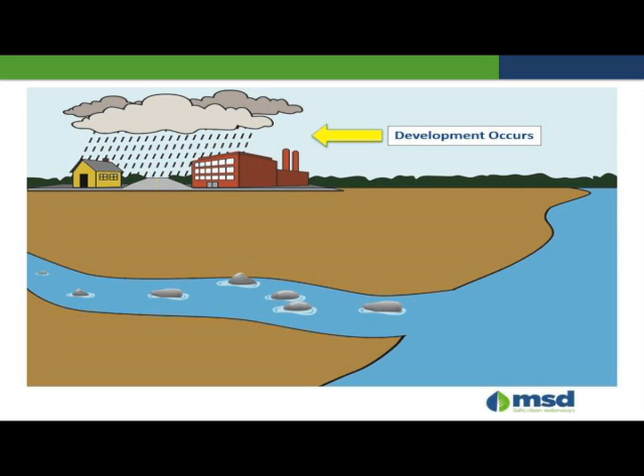Prior to sanitary sewers, what happened to the waste that left a facility, whether it's a house or a building? It ended up in the street. They just tossed it out the window. It was out of the house, out of their way, no big deal.

Well, as you know, this leads to health problems. And in order to combat the health issues associated with the disposal of waste in this manner, they started piping everything directly to the nearest creek or stream and turned those basically into sewers, the early sewers. They'd put a cover over the top of them, and then everything would make its way to the creek and the river.

Kind of a schematic of what it is. As you can see, the one on your left is how the combined sewer system worked. A sewer left a house or a building to a sewer in the middle of the street, tied in directly to the nearest creek, river, or stream. So anytime anything went through those pipes, it went to the water body.

As civilization progressed and water treatment technologies became available, water treatment plants were built. Louisville did not put Morris Forman into operation until 1958. So think about that: within the last 60 years is all we've had water treatment in the city of Louisville. And the city's been around a long time.

So in order to get the flow from the sewer to the treatment plant, what they did to the sewers is they went in upstream of the water body. They put in what we call a dam or a weir, which is like a concrete structure up to a certain height in the pipe. And what that did is it helped divert water from the river to the pipe to the treatment plant, as you can see by the low flow line that's shown there.

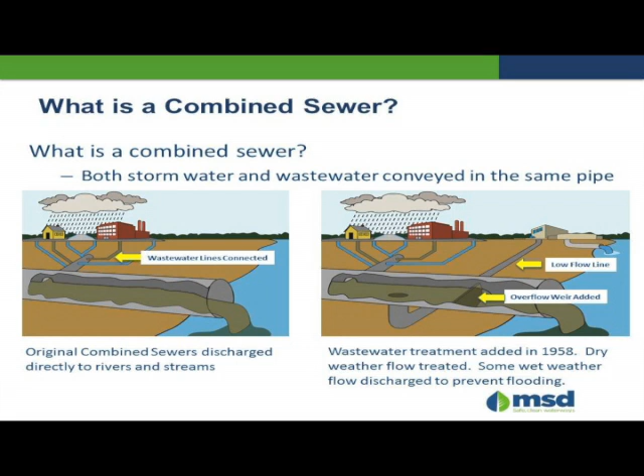However, that was only sized for average daily flow, which you would see during a typical day. It didn't account for rain events. So anytime it rains and the sewers become overwhelmed, the flow goes over the weir and straight to the water body, which in our case for this project is either Beargrass Creek or the Ohio River.

With rain events, it only takes about 1/10 of an inch of rain to create an overflow in the combined sewer system area. The combined sewer system area is roughly the boundary of the Ohio River and the Watterson Expressway, so anything within that is considered the combined sewer area, where storm lines tie into the sanitary sewer lines.

Some of the sewers that were built, the early sewers, such as the Southwestern Outfall, built in 1932, are still in service today. So a lot of the older sewers we have are still in service, and these are the ones that carry flow to the treatment plant or to the river during an overflow event.

Overflows, what do they look like? There's several different scenarios. This one is the sewer itself adjacent to a water body. And when the sewer becomes overwhelmed, the water comes out straight through the manhole. So it blows the manhole off the top, water goes to the creek.

Here's another one in a neighborhood. The sewer system is overwhelmed here, and the flow's coming out of the manhole in the street right in front of the residential properties. Where are sewer overflows?

It's basically throughout the service area of MSD. The combined sewer system, as I said, is within the Watterson Expressway. And that's what we're here to focus on today as we talk about it.

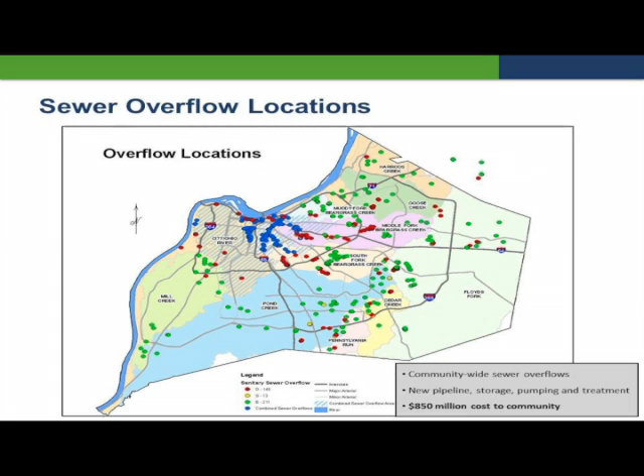How do you control sewer overflows? Well, there's several different ways. You can control it at the source with green infrastructure, such as rain gardens, bioswales, planting of trees, removing of impervious pavement. You can disconnect the downspouts from the sewer system. Previously, they went into pipes and tied into the drains, which tie into the sewer. So we have a program that allows you to disconnect your downspouts and put them on the surface.

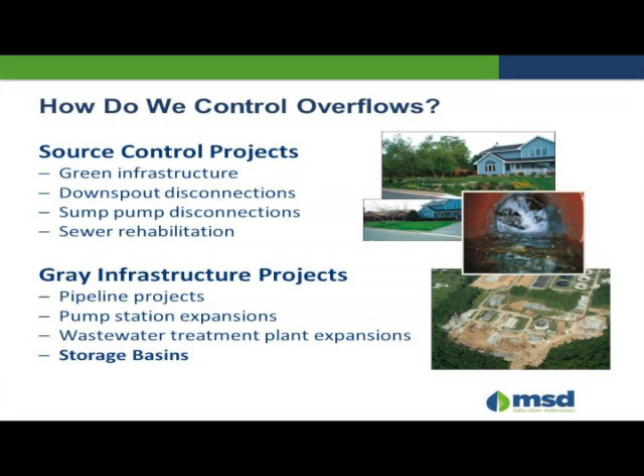You also have the option of disconnecting sump pumps, because sump pumps typically in the past have been connected to the sanitary sewer line of the house, which goes to the sewer and eventually the creek as well. So if you discharge those above ground, that helps remove that flow from the sewer system.

Or you can do sewer rehab, which you go in, you cut out the roots, you repair any cracks or deficiencies, and line the pipe if necessary to keep any groundwater from getting into the sewer itself. So you reserve capacity for the sewer flow from the facilities instead of groundwater.

Other options are gray infrastructure, which are pipe projects, where you put in new sewer systems, you abandon old ones, pump station expansions, wastewater treatment plant expansions, or storage basins. Storage basins is what you've probably heard a lot about, and there's been a lot of them built within the community. It's part of our consent decree program.

As you can see on the timeline, there's 4 separate stages. One was the sewer separation, or separate sewer system projects in the early stages. Got us the most bang for our buck on the volume of overflow to the river. Next was treatment center eliminations.

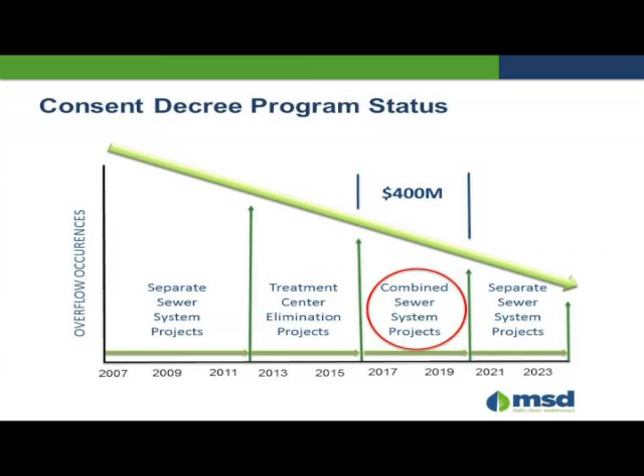At one point in time, MSD had over 300 small package treatment plants. Today, we are down to 5 regional treatment plants. So we have better technology treating the water instead of the old, outdated package treatment plants that were installed.

The phase of the project that we're in now is the combined sewer system projects, which are the storage basins or the Ohio River Tunnel project. That is slated to go until about 2020.

At the end of that phase, we will move over into the separate sewer system projects once again to clean up what is left in the IOAP. As you can tell, the projects that we're in now is about a $400 million undertaking. So from 2017 to 2020, about $400 million.

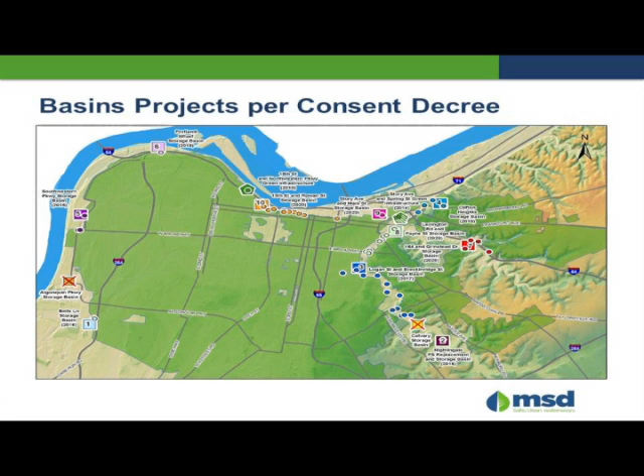The map you see here is the location of the basins. As you can see, it's not concentrated necessarily in one area. It's kind of spread out within the combined sewer system area. And those locations are identified based on where the actual overflows occur. So anywhere there's a pipe that may tie into the water body, the facility is generally built within that area. That way we can capture it before it goes out.

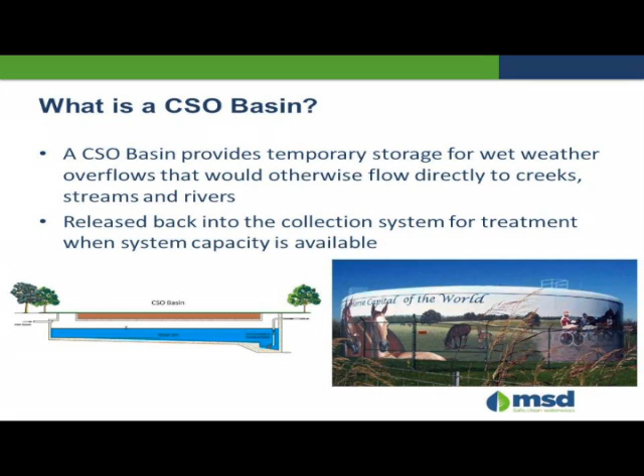So what is the CSO basin? It's basically a temporary storage facility where you catch the overflows before they go to the creek during a rain event. Once the rain event is over, those flows will be pumped out of the storage tank and back into the sewer system for conveyance to the treatment plant for treatment and release back into the Ohio River.

So a lot of questions we ask about the storage basins. Will they create backups? No. The way we have it designed is that the high water elevations of these facilities are below basement elevations and generally the existing sewers that they're taking flow from.

What happens when the system is full? When a basin is full, the overflow occurs then as it does now. It goes out of the same existing pipe we have right to the creek or the river.

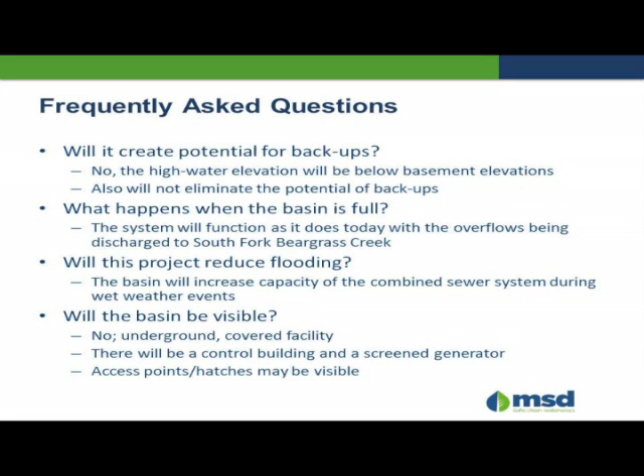Will this reduce flooding? While the basin takes wet weather flow out of the pipe, it does not reduce flooding in areas. It's not a flood control project.

Will the basins be visible? The general answer is no. A lot of these are being built in such a way that they are covered when they're done. You may see a control building or some other feature that is above grade, but overall the facilities are buried when finished. Odor, everybody always asks about odors.

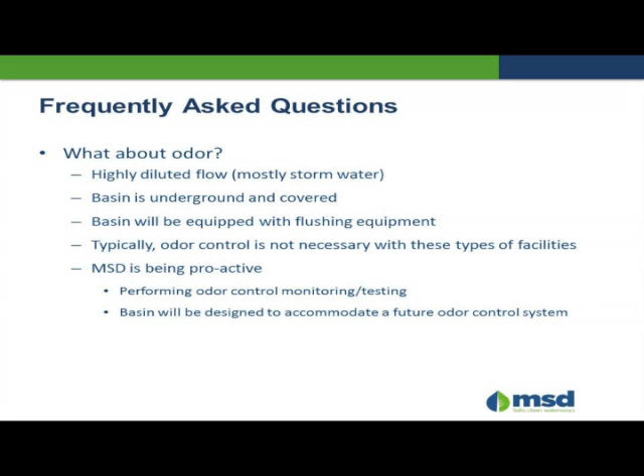Generally, there are no odors associated with these facilities. Most of the time, they're empty, unless it's a rain event in which the flow is stored, and it's usually stored for a short duration. 24, 48 hours is what the plan is before it's pumped out and sent back to the sewer system.

You also have to keep in mind that this is diluted sewage, so it has a lot of rainwater mixed in with it. So it's mostly rainwater with a little sewage in it. It's not raw sewage in these facilities.

A lot of these facilities are being planned proactively with options for odor control facilities to be installed at a later date. So we're putting in the infrastructure now that is needed. That way, if odor is an issue, we can buy these new facilities and just retrofit them in with little cost and little effort.

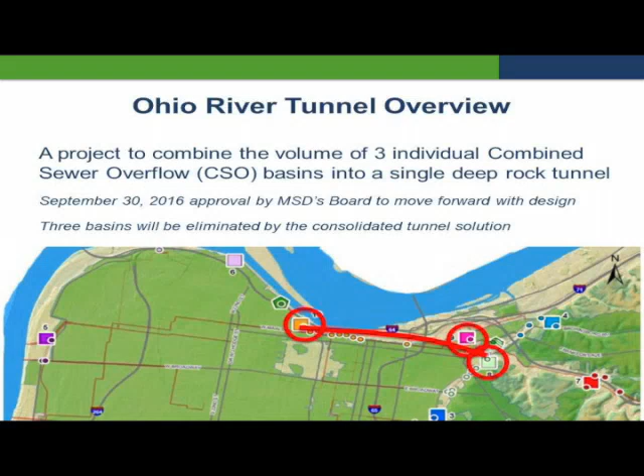So, overview of the project. Originally, there were 3 basins planned for the downtown area. As you can see in the circles there, one was at 13th Street near Rowan, one was in Butchertown near Franklin and Buchanan Street, and another one was planned on the old River Meadow site on Lexington Road, kind of near Payne Street.

Well, after getting through part of the design of those and looking at all of our options and hearing from the community, it was decided that we would pursue a tunnel option. So these 3 facilities went away and were replaced with a tunnel.

Now, reasons we went with the tunnel: there was feedback from the community regarding what we were planning, so we went back and looked at our other options. We looked at traffic disruptions to the neighborhoods and the community, as the basins would require a lot of traffic in and out. The tunnel should have less impacts to the community with traffic during construction.

Economic impacts to downtown businesses should be less with the tunnel versus the basin options that we were looking at. Consent decree still mandates that this project be completed by December of 2020.

Community meetings to date: as these basins were being developed, there were several meetings held with the Butchertown and Irish Hill communities. As we went through design, there were orientation meetings, conceptual meetings, and after the conceptual meetings, we had 2 update meetings, and that was the transition point from the basins in their neighborhood to the tunnel itself.

For the downtown group, since you all are new to the projects, we've had several meetings with Louisville Downtown Partnership to discuss our community outreach engagement, how we were going to do it, who we were going to contact, and we've even had individual meetings since then with the Kentucky Science Center and the Ali Center regarding impacts to their properties.

The Ohio River Tunnel. As I said, it replaced 3 basins, but it is divided into 4 individual projects. One of them being the Ohio River Tunnel, one being the Rowan Pump Station, which will dewater the tunnel.

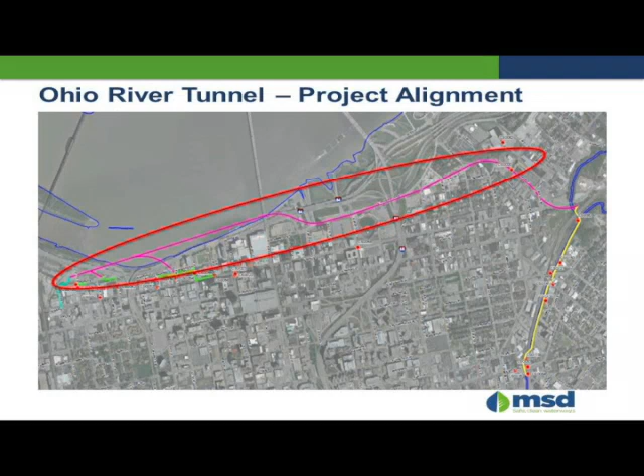So the Ohio River Tunnel, where is it? This picture will be referenced several times throughout the presentation, but the Ohio River Tunnel is generally along the river. You can kind of see it in the magenta line on the aerial. It starts at 13th Street, heads east out under 64 into the Ohio River, below the Ohio River until you reach roughly the 2nd Street Bridge, at which point it'll turn south to Witherspoon.

It'll follow Witherspoon along Waterfront Park under the I-65, 64 corridor until it reaches Butchertown, at which point it'll turn south and follow roughly Buchanan Street to East Main Street to its terminating point at the Home of the Innocents property.

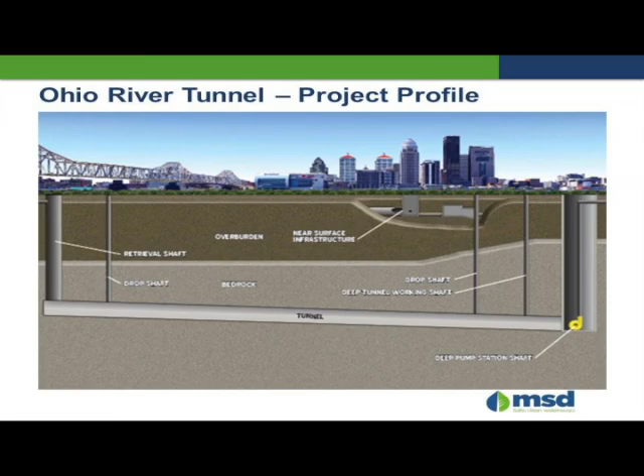What does the tunnel look like? Brief profile: we're over 200 feet to the bottom of the tunnel on average. The deepest end is the 13th Street end, where the pump station will be, and it goes uphill from there to the East Main Street location. The tunnel, being 200 feet deep, is deeper than the Galt House is tall — just a fun fact for you.

The tunnel itself is in solid bedrock. We did several geotechnical borings along the corridor to over 250 feet in depth to figure out where the limestone area was, and then the depth of the tunnel was based on the quality of the rock in that location.

The tunnel itself is roughly 13,400 feet in length, so it's just over 2.5 miles. There is a location in there called a bifurcation that is 1,200 feet in length. A bifurcation is basically a Y connection, like you'd see in a standard plumbing system — it just has a more technical name for a tunnel. The tunnel is 200 feet below ground, and the tunnel diameter, when finished, is a minimum of 20 feet. Excavated diameter will be roughly 22 feet or so, as there will be a 1-foot concrete lining on the inside of the tunnel.

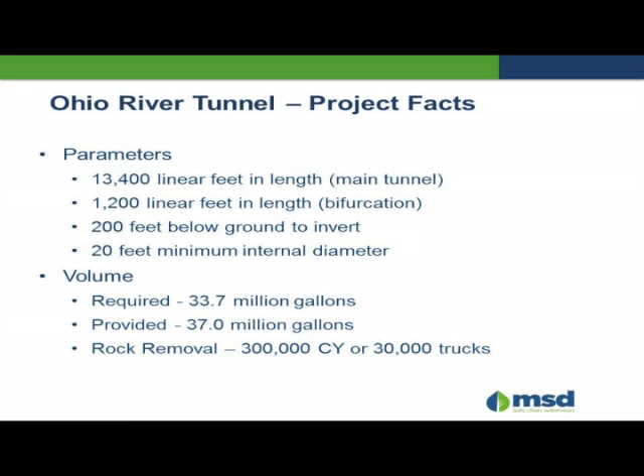Volume of the project: the IOAP required, with the 3 basins, 33.7 million gallons of storage. With the tunnel volume that we have, approximately 37 million gallons. So the tunnel meets the objective of the capture required.

Another fun fact for you: rock removal on the project along the tunnel itself is approximately 300,000 cubic yards, or 30,000 truckloads. Now, I know it's an impressive number, and everybody concentrates on the number of trucks coming and going. This won't happen all at once — it'll happen over a duration, so it's not going to be 200 trucks a day or anything. It'll be a smaller amount, but there will be a lot of traffic.

To give you an idea what the tunnel looks like, MSD staff and our consultants made a trip up to Indianapolis, where they are doing a similar type of project. However, their project is about 28 miles in length and a finished diameter of 18 feet.

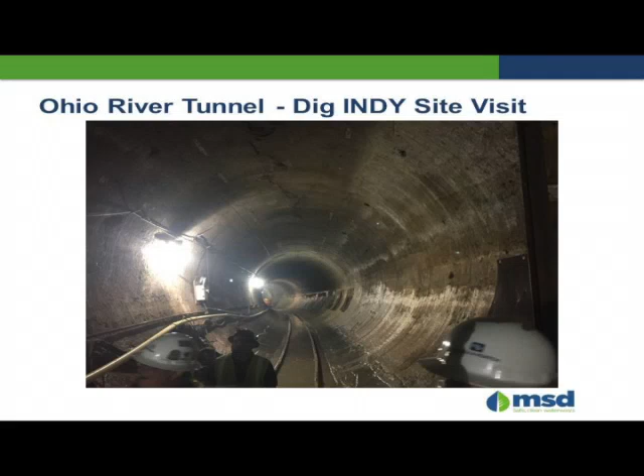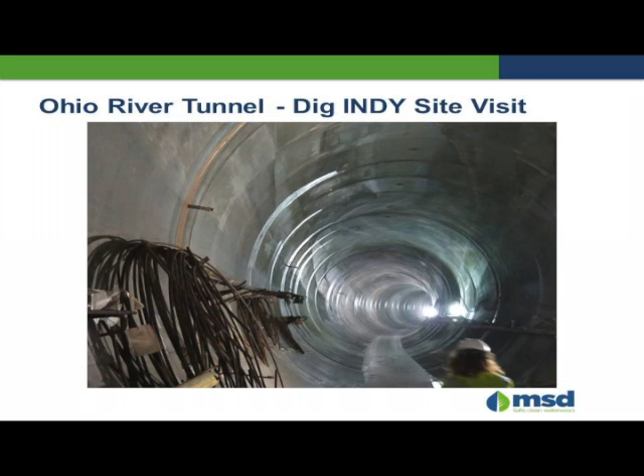This picture here is of the tunnel in Indianapolis that's been excavated and the utilities removed for final lining. The picture you see here is a final-lined tunnel — that's a concrete interior surface of a tunnel. And here's a picture of the group, to give you an idea of the scale of the people in the tunnel and how big the tunnel itself is.

Shafts associated with the tunnel project: there are multiple locations where flow has to enter the tunnel from the surface. The first one is the pump station shaft.

This is the shaft where the pumps will be placed that will dewater the tunnel back to the existing sewer system for treatment at the Morris Forman Water Quality Treatment Center. The second shaft is the working shaft, which you saw in the previous pictures, where people go in and materials come out.

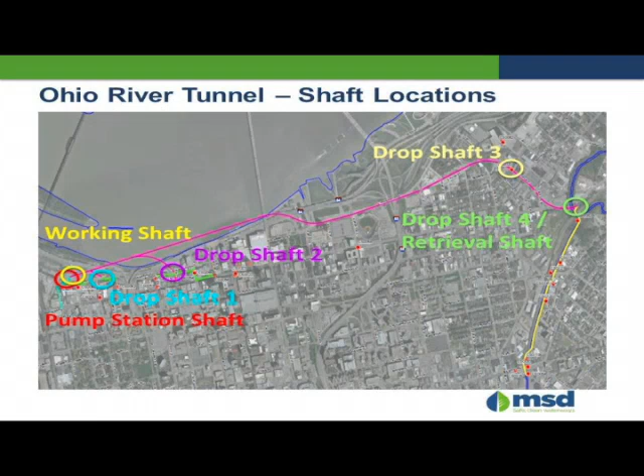The third location is drop shaft 1, as it's called. It's the site nearest the pump station shaft where flow enters, and this enters from the Rowan Street area.

The second location we have, drop shaft 2, is roughly at 7th and Washington Street, where flow will enter from that general area. Another location is drop shaft 3, which is near Franklin and Buchanan, where flow will enter, next to the Starkey pump station.

The final location is drop shaft 4, or what is known as the Retrieval Shaft. This will collect flow from the Irish Hill area and put it into the tunnel. It is also called a retrieval shaft, as this is where the tunnel boring machine will exit the ground upon excavation. So it'll go in at one end and come out of the ground at some point later at the other end.

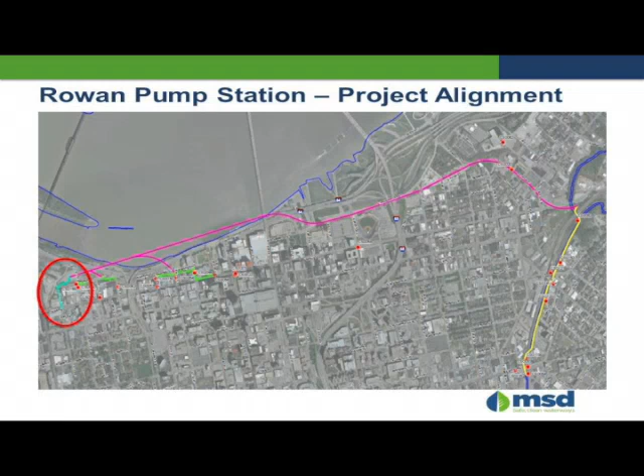Up next, Rowan Pump Station. It's concentrated on the west end of the project corridor at 13th Street. It's a zoomed in area.

Pink lines you see on the image are the tunnel itself, and you can see the pump station and working shaft sites. The green line is a 60-inch diameter interceptor that, once the flow is pumped up out of the tunnel, will be placed into this pipe, and then go down 13th Street, roughly to Main Street.

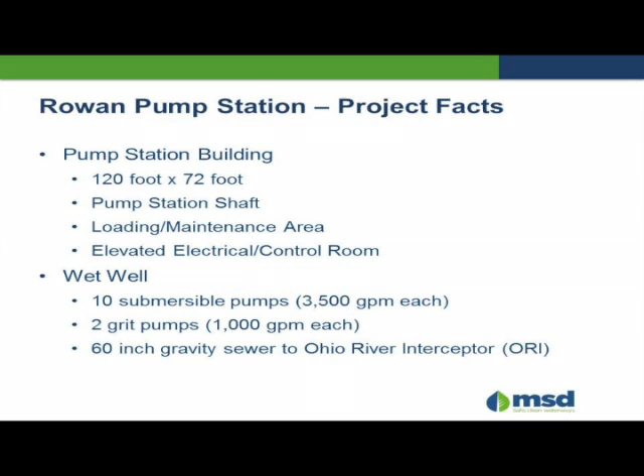Where it'll tie into the Ohio River Interceptor. The pump station will be a building on the property, about 120 by about 72 feet in size. This facility will house the pump station shaft, have an area for loading and maintenance of pumps, as well as an elevated control and electrical room to operate the facility.

Just to give you an idea, there will be 10 submersible pumps placed in there to dewater, which have a capacity of about 3,500 gallons per minute. There are 2 grit pumps that will be placed there to help remove the solids that get into the tunnel, at about 1,000 gallons per minute each. And as I said, it will be a 60-inch gravity sewer back to the existing system.

Kind of an idea of what the control building looks like. There's the layout of it, and the colors kind of identify the 3 different areas talked about.

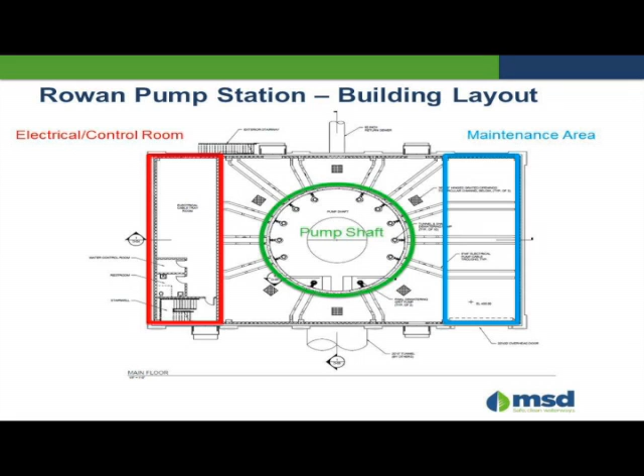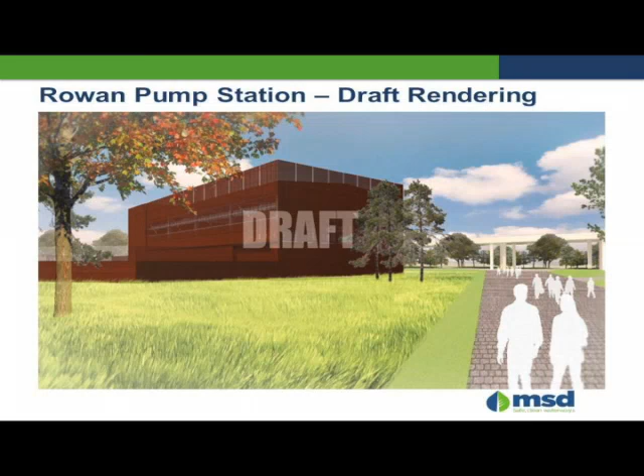Everybody likes to ask, what does the building look like? Here's a rendering, a draft version of what the building will look like. MSD is working with Waterfront Development and their architects to come up with a facade for the building to help meet their master plan objectives for Phase 4 Waterfront Development.

This is kind of what they've come up with. The bottom portion, roughly 10 feet or 1/3 of the building, is a concrete structure, currently planned to be painted a brown rust color. The rest of the building, the top 2/3, would be a metal structure. There's a similar type structure in Riverview Park in southwestern Jefferson County. This is just a bigger version of that structure.

There's another view of it for you. Next up, Lexington and Payne CSO Interceptor. This is concentrated on the east end of the project.

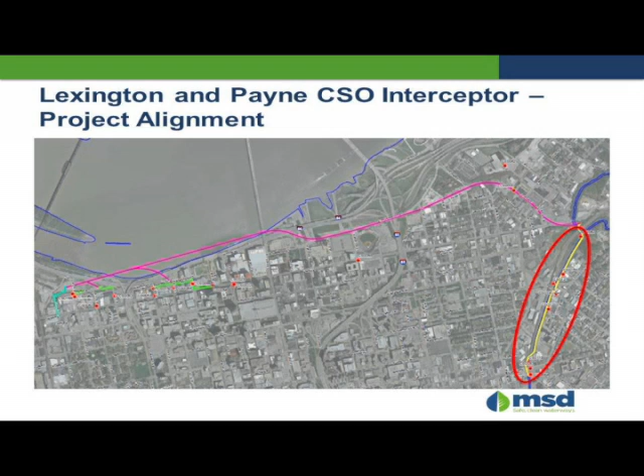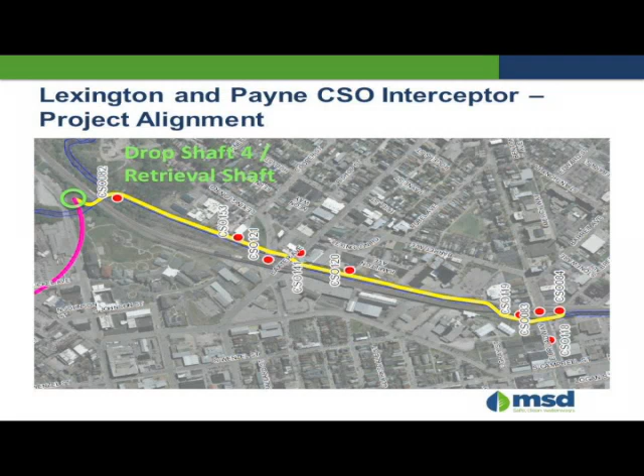This project, as you can see, is within the Beargrass Creek concrete channel from just south of Broadway to East Main Street, where it ties into drop shaft 4 in the tunnel. This sewer line is about 5,000 feet in length and will connect to 9 CSO locations along Beargrass Creek in that area. The pipe size will range anywhere from 36-inch diameter at the smallest to 102-inch diameter at the downstream end, where it connects to the drop shaft.

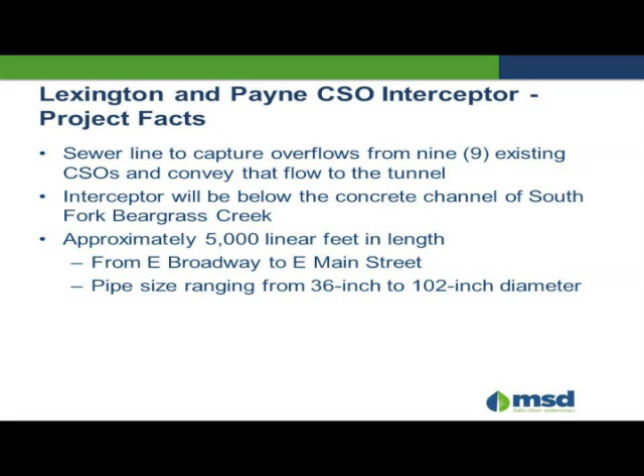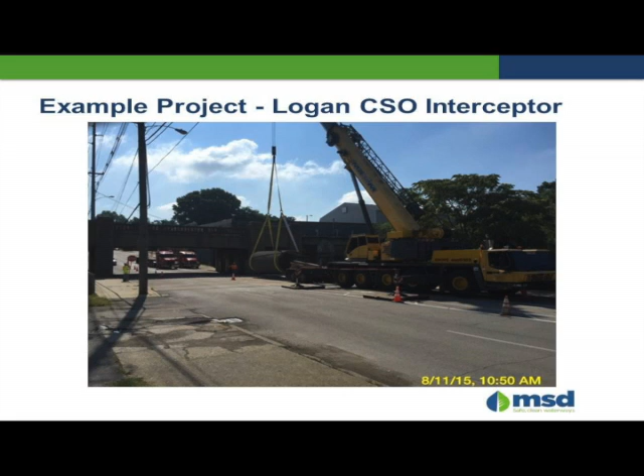A couple examples of what this project will look like. MSD recently completed the Logan CSO Interceptor project, which was in the improved channel of Beargrass Creek from Eastern Parkway to roughly Kentucky Street. So these are some pictures from that project. They put in a 96-inch pipe as part of that project, so we're roughly the same size.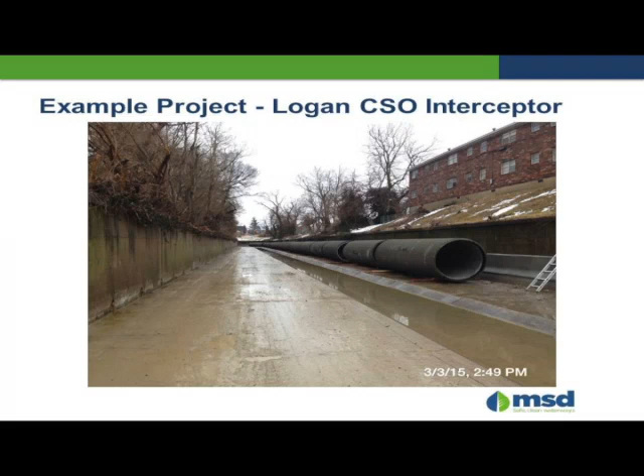But you can see the crane will lift the pipe up from the semi that brings it in, and they will place it in the channel for staging, kind of like this picture here. And as they're working, they will remove one side of the concrete channel to put the pipe in.

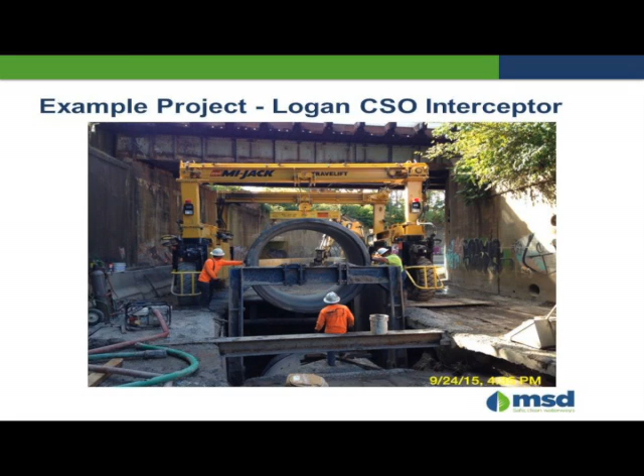They'll use a machine that looks something like a mobile gantry crane, which will pick the pipe up, move it around, and put it back in the trench. As you can see there, that's what it looks like as they're putting it in, getting it lined up and ready to go.

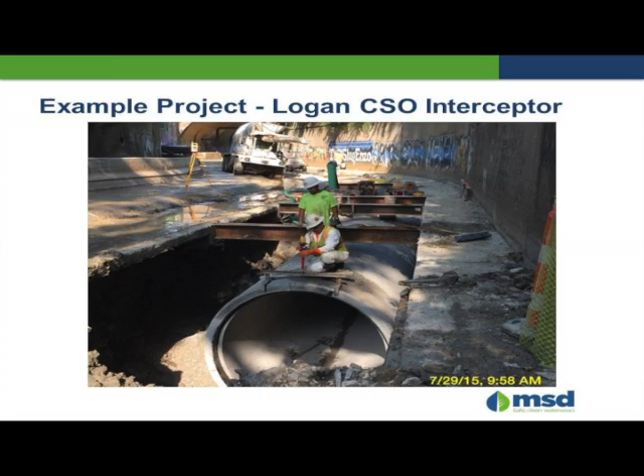The way this project went, as you can see in the picture, there's a cement truck in the background. Concrete was placed around the pipe as it was installed to fill the voids in and give us that concrete channel back.

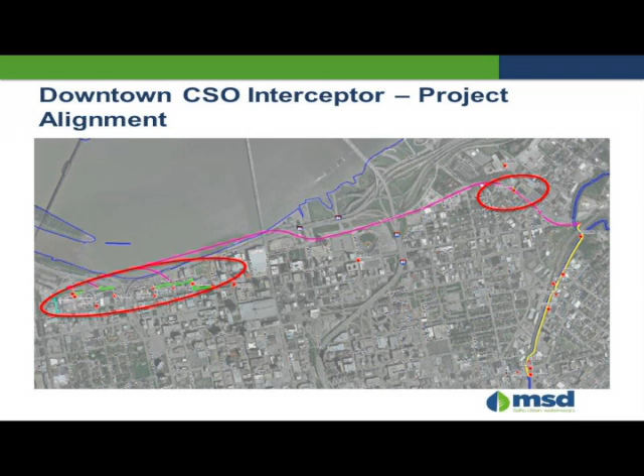Next project is the downtown CSO Interceptor. This is within the central business district of downtown. There's also a small section that'll be done over in the Butchertown area. This sewer will capture overflow from 12 locations in the project area, and there'll be approximately 2,000 linear feet spread out over multiple locations. Size of pipe for this one is about 12-inch to 60-inch in diameter.

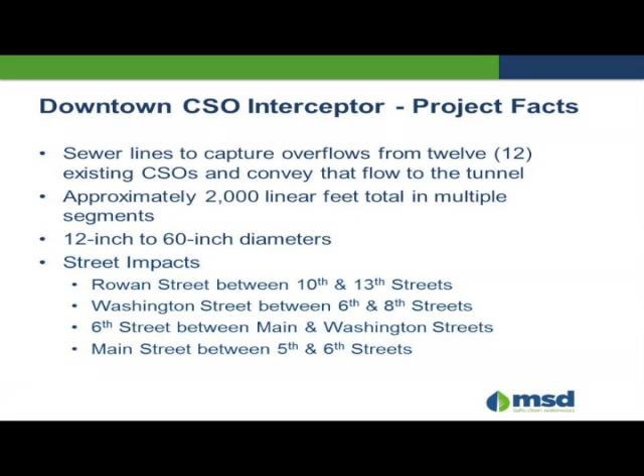There will be impacts to the street to get the interceptor pipes in and to the tunnel drop shaft locations. We're roughly working in Rowan Street between 10th and 13th Street. You'll be working in Washington Street between 6th Street and 8th Street. They'll also be working in 6th Street between Main Street and Washington Street. And there'll be work in Main Street between 5th and 6th Street.

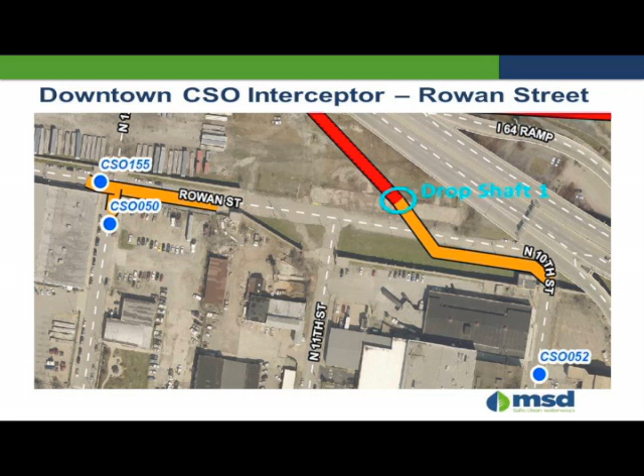Now the part over by 12th Street, we're remodeling the two sewer areas over there to reuse as much of the existing system as we can, but we will be digging up that intersection to make connections to those CSO structures. That's why the orange line doesn't go all the way down Rowan Street.

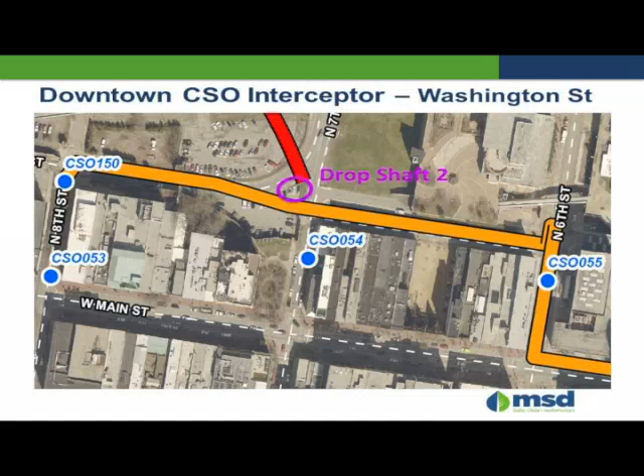The Washington Street area, as you can see on the left at 8th Street, there's a structure immediately inside of the flood wall right there. There's some hatches kind of in the loading area, the Kentucky Center for the Arts. We're going to pick up that structure right there, cross the flood wall over to Washington Street, and then follow Washington Street over to 7th Street.

The drop shaft will be kind of located in that grassy area at that intersection across from the parking garage entrance. Now the work from 6th Street, there's an existing structure there that we're going to tie into, and we'll send the flow west to 7th Street to the structure that drops into the tunnel.

The work on 6th Street itself is just connecting the new sewers to the area near Washington Street and then the Main Street sewer into the 6th Street sewer. So we're not going down the full length of 6th Street.

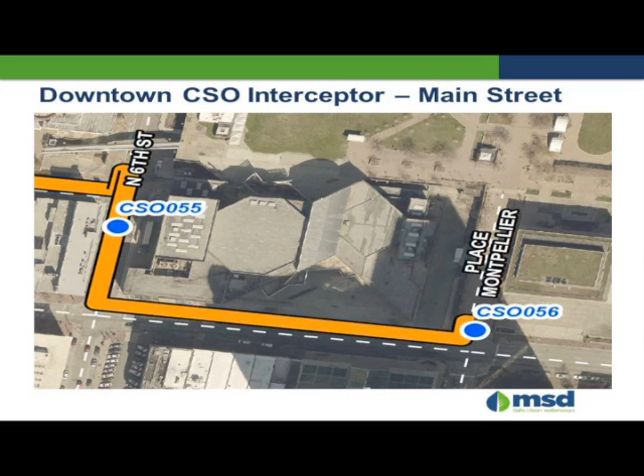Main Street, the area is between 5th and 6th. I'm not sure if you're familiar with it or you ever even paid attention, but the fountain there at the entrance to the Belvedere actually has a structure lid to our CSO location. So what we were planning on doing is intercepting that before the fountain in Main Street.

That way we do not have to tear up the Belvedere or the fountain or the parking garage below the Belvedere. So we'll connect to the pipe in Main Street and send it west along Main Street to 6th Street, where there's an existing sewer.

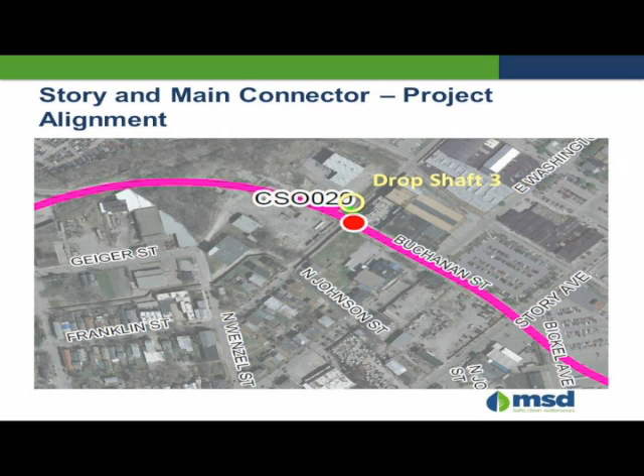The other portion of this is what we're calling the story and main connector. It's roughly 200 feet of pipe that will connect to the CSO location near Franklin and Buchanan and put it into the drop shaft that's located on that property. That's roughly 200 feet of pipe, and it's about 48 inches in diameter.

Project schedule: there's 4 different projects, so there's 4 different schedules taking place. The tunnel itself has been advertised and is out. We're looking at doing a bid opening in September with a board award at the end of September, and hopefully construction to start towards the end of October. We're looking at a substantial completion date of summer, or June of 2020.

The Lexington and Payne CSO Interceptor is designed, looking at advertising next week, and then we'll have a similar procurement schedule as the tunnel.

With a bid opening in September, board award at the end of September, and construction sometime in October. This one is a shorter duration. It would be done in June of 2019.

The downtown CSO Interceptor would be the third project advertised. We're looking at completing design sometime in September and going through the procurement schedule, with an award possibly in October and a construction start date in November of 2017, with construction complete in October of 2019.

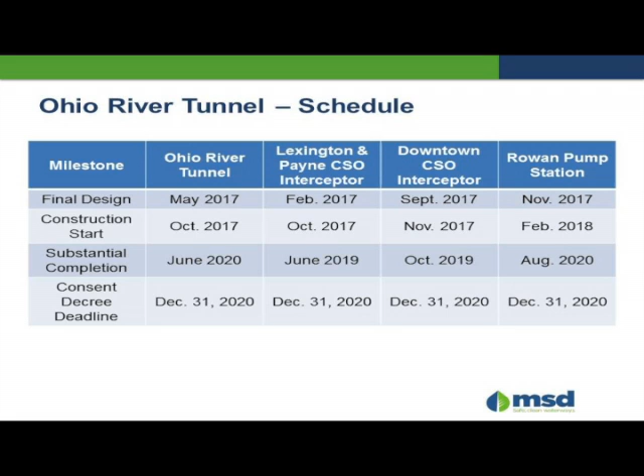The last project out for bid will be the Rowan Pump Station. Design is projected to be complete in November of 2017, with construction to start in February 2018. That project is supposed to be substantially complete by roughly August 2020. And as you can see, those are all before our December 31st, 2020 deadline.

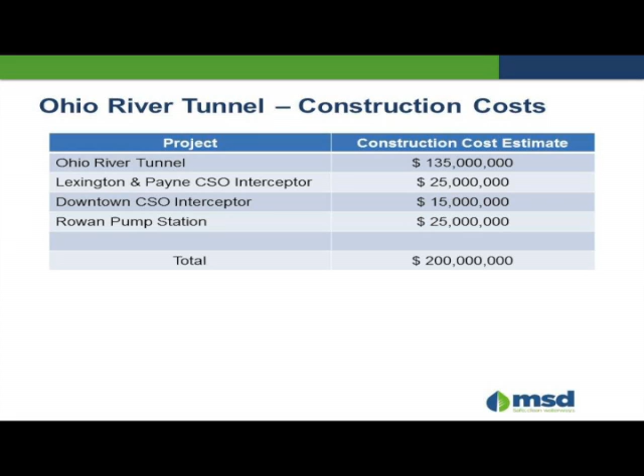Up next, cost. Everybody's favorite question, what is this going to cost? As you can see there, each one is listed. The Ohio River Tunnel is estimated at about $135 million. The Lexington Payne Interceptor, about $25 million. The Downtown Interceptor, about $15 million. And the Rowan Pump Station at about $25 million, for a grand total of $200 million.

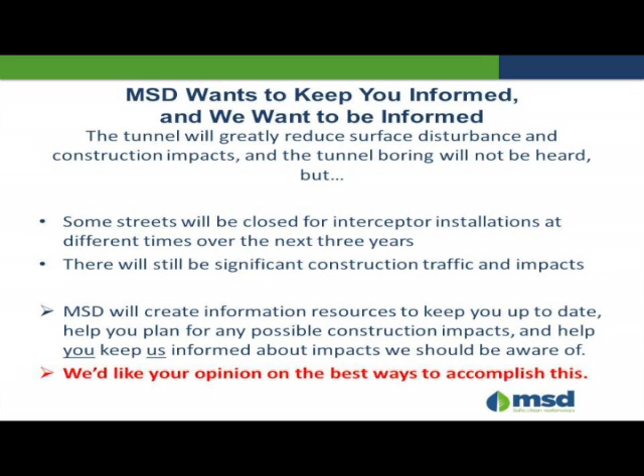What we'd like to do going forward is make sure we keep you all informed of what's going on. We'd like to be kept informed of what you all have going on, because we know this impacts a lot of what you all do on your daily basis with your businesses. So what we've done is work on keeping you all informed regarding street closures, construction traffic, and impacts as we go through here. So what we'd like to do is get some information from you all at this time.

As we go forward, how would you like to hear about our tunnel project or the 4 projects we discussed today? Additional public meetings like you're having today, mainstream media, district council newsletters, the MSD website, a dedicated project website specific to these 4 projects, an email list, Twitter, Facebook, text messages, and we can also post information to Louisville Downtown Partnership's website.

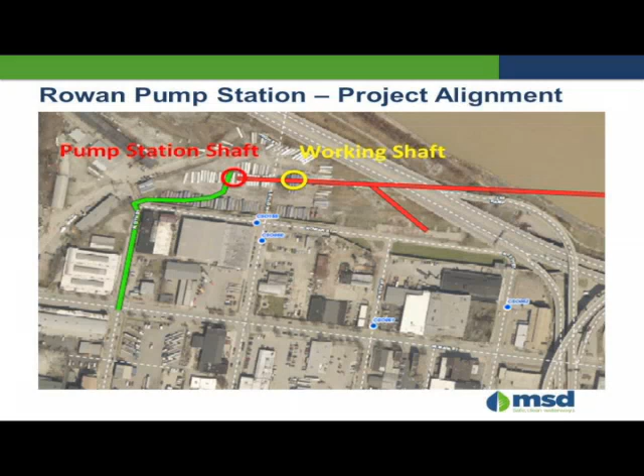Okay, anybody else, question? Yes ma'am. I'm Andrea Wilson, I'm responsible for the Fort Nelson building, where we're building an urban consumer experience there at 8th and Main. So I need to really understand what's going to happen with that road behind the building, on this side of the flood wall, because that's our main corridor for load in and load out on a daily basis for the operation of our still.

So those are all the same concerns that we've been addressing in the Science Center conversations. We should pull these guys into those discussions. So you're talking about Washington Street? Yes, that's correct. Okay, you're worried about getting in and out?

Yeah, just on a daily basis, because we'll have daily deliveries of not only items for the operation of our still, but mash and different things. So it's not an option to just say, oh, we can't get in today. We have to be able to receive those deliveries.

So there's probably a fair bit of coordination there, if indeed you're tearing up that road. Right, we're gonna have to work through that and coordinate how to do that. And we will do that, we'll have to get together, talk about it, and look at it.

But yeah, I figure Science Center, Frazier History Museum, everybody's got to move trucks through there. That correlates with that issue of that piece of the project closing our parking lot access. Yeah, and we will look at that, kind of coordinate all those will be integrated issues on that.